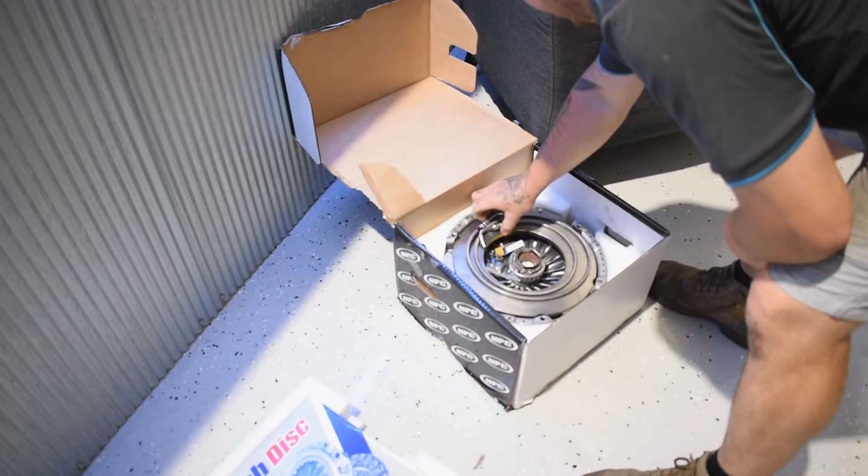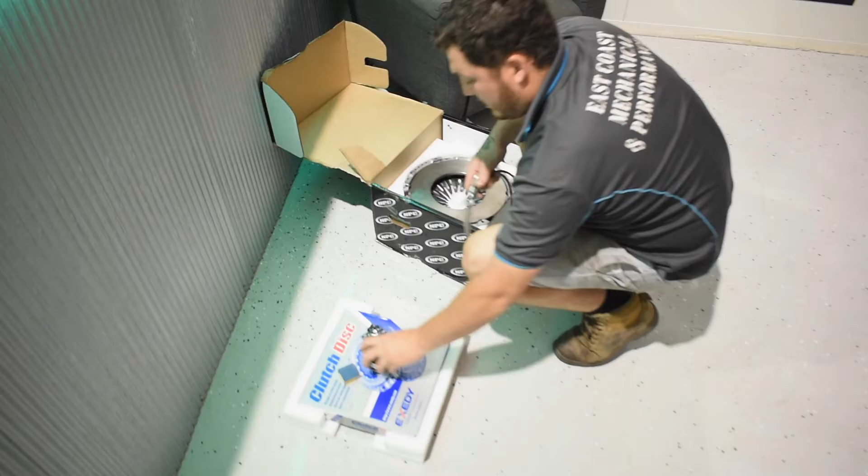1300 Newton meter clutch for the VDJs. Pretty much a must-have as soon as you're going to tune these pre-DPF models, eh? 100%, they will not handle it, especially towing. So they come with the bigger throwout bearing. Our little trick is we opt to have the braided clutch line, gives you a lot nicer pedal feel. Some people say it's not as heavy.

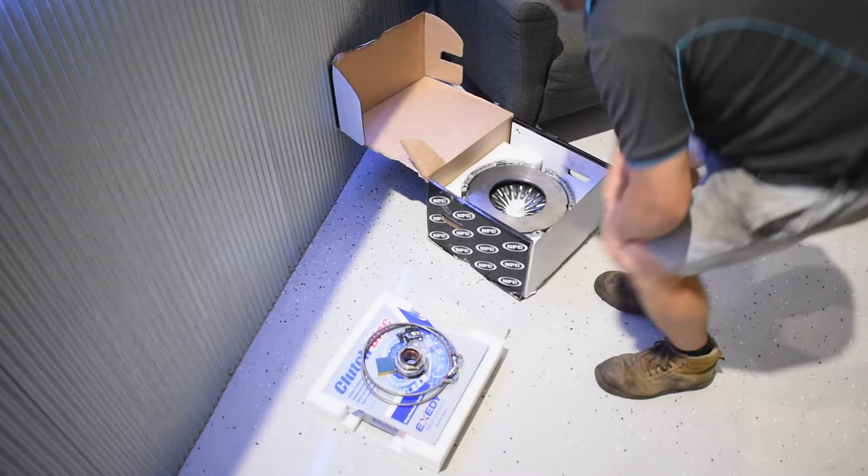Being the 1300 Newton meter kit, it also comes with your alignment tools. Sweet, makes it easier. And your flash billet NPC flywheel. Everybody loves the billet. Hey, give us a look.

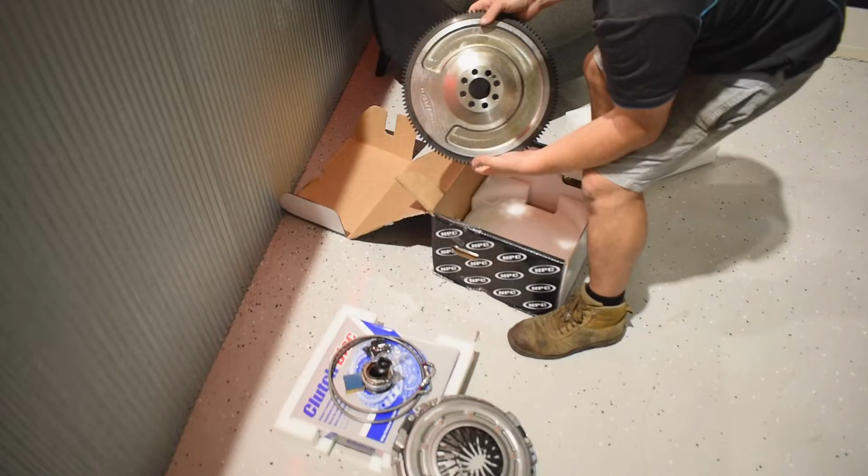Is that bastard heavy? Yeah, it's there, like 30 kilos, that whole box. Yeah, like 26 or something like that. Yeah, I tried to move it before, and yeah, it's there.

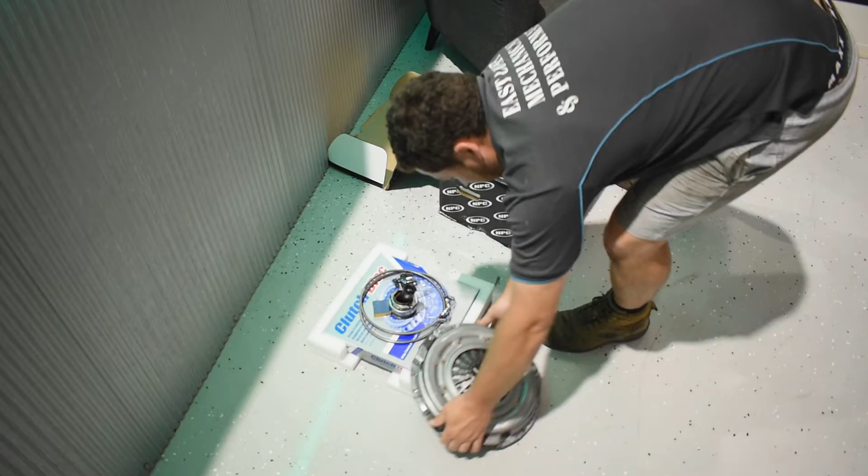So we'll get that in tomorrow, smash it out and see what we can do on the dyno. Sweet man, looking forward to it. We're back down here first thing in the morning. We'll get stuck into this big rig.

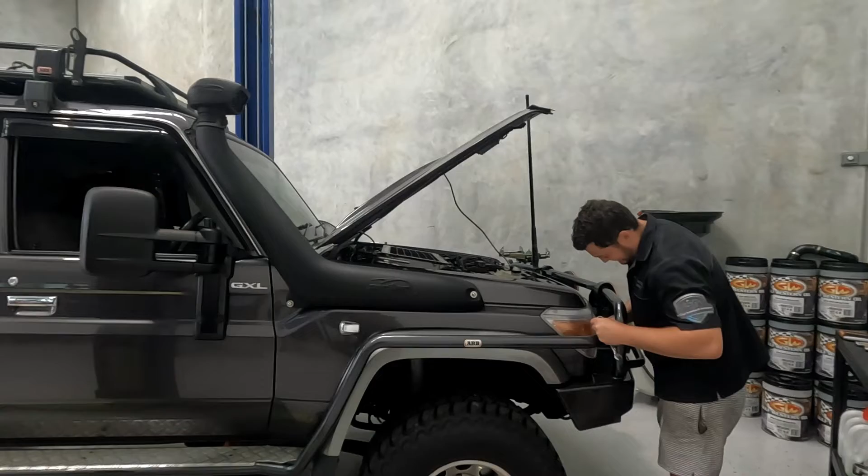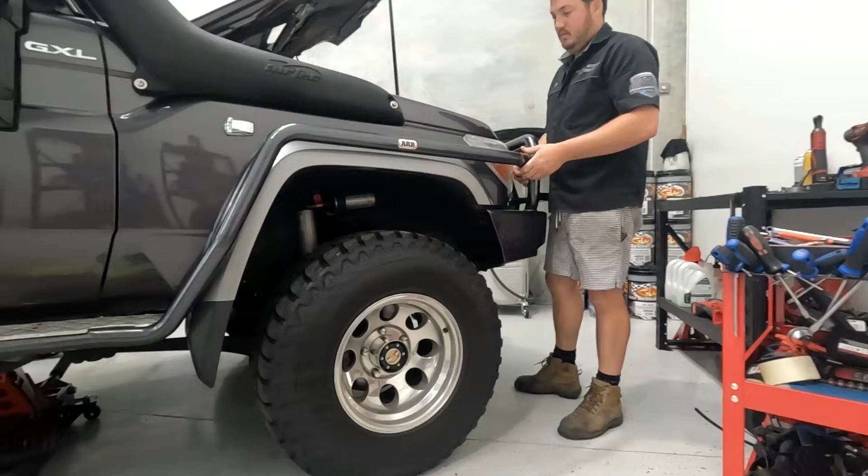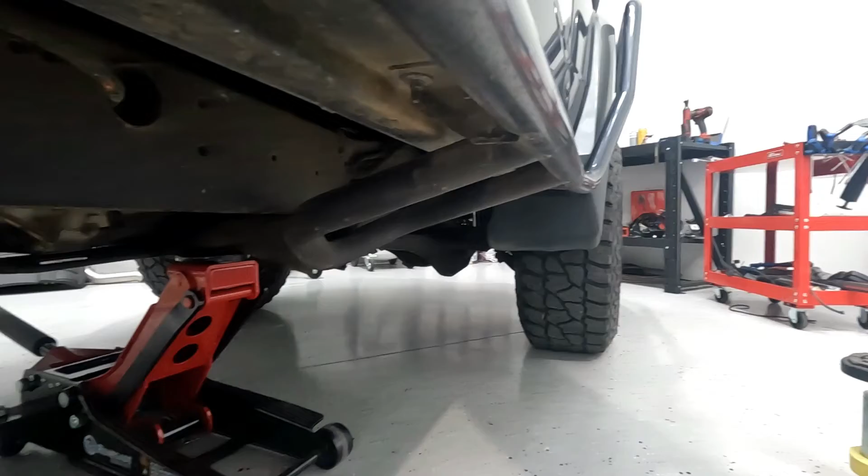What's going on? So with the ARB side steps and brush rails, they actually use the cross member as a mounting support. So what we recommend is, the easiest way to get it out is to completely remove them, one side off at a time, put the bolts back in, do the opposite side, then go up in the air, then move it with the gearbox. Bastard, eh? So let's see if we can see what they're talking about here. You can see the braces for the side steps come down, they're actually one piece with the cross member, so you can't get the gearbox out with the things in the way.

Much fun. Oh, I'm gonna drink my coffee and watch. Ooh, where's your toilet? Give me 5, I'll be back. A few moments later.

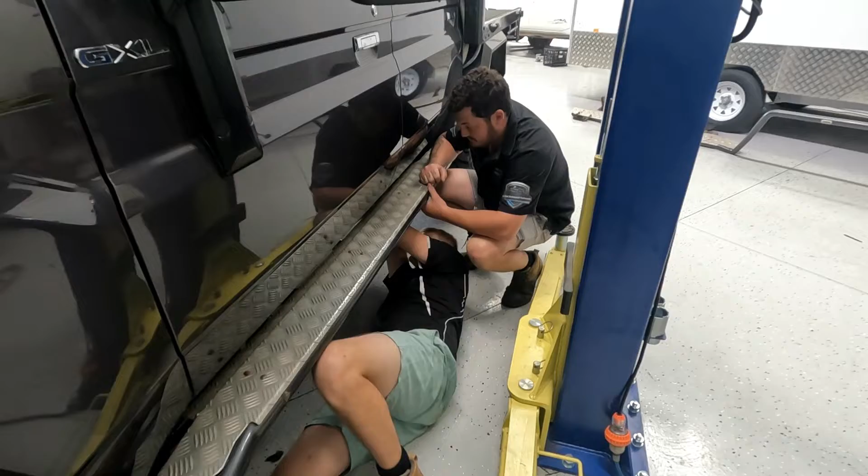How's the view down there, Mitchie? It's good, mate, oh I've had better. A little bit of nut butter? Yeah, did you have a shower last night, Jamie, at least, or what? Lucky for his sake I did. It's not more worse than you have had. Short shorts is life.

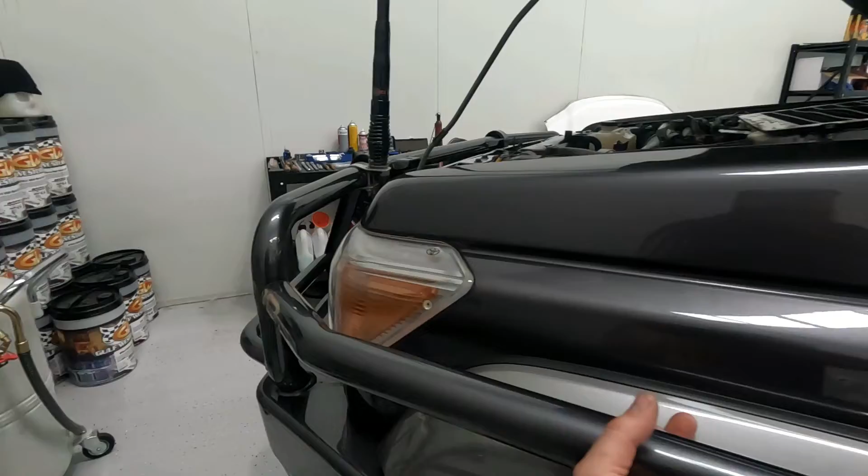So we had to disconnect from the front here, get the sidebar off. Boys are just underneath now, undoing the cross member bolts. We'll drag this fella out.

On a scale of 1 to the Simpson Desert, how much sand's in your eyes, mate? About Simpson Desert? Yeah, a bit of Simpson Desert. I didn't know how to answer that. That's what I'm here for, mate. Alright, it's all yours. Righto.

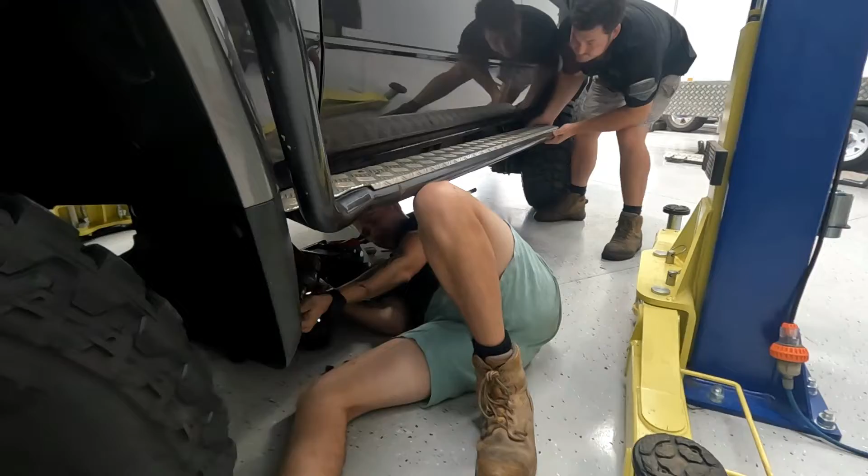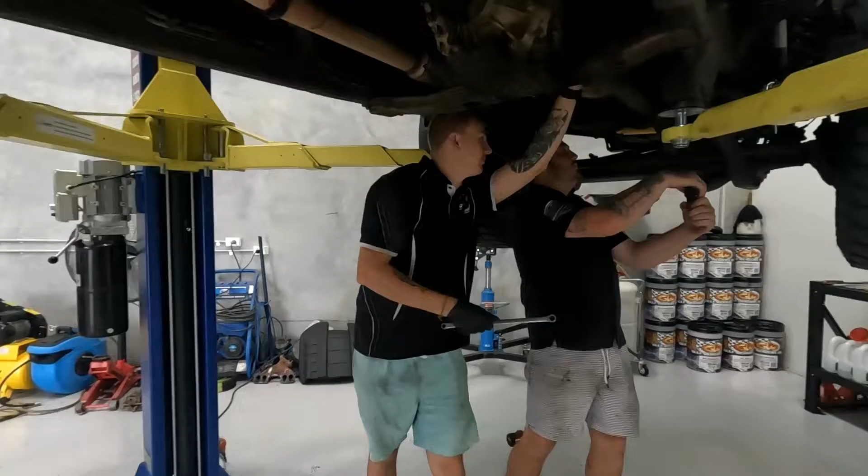Watch this end. Sweet. Beautiful. Righto, scrub bars are off, we're up in the air. I'm not going to go through all the dirty nitty gritty, we've got a bit of a time lapse cracking, so we'll put that on, but what do we got? Sway bars got to come out, tail shafts, got him, because you're not working out, cross member.

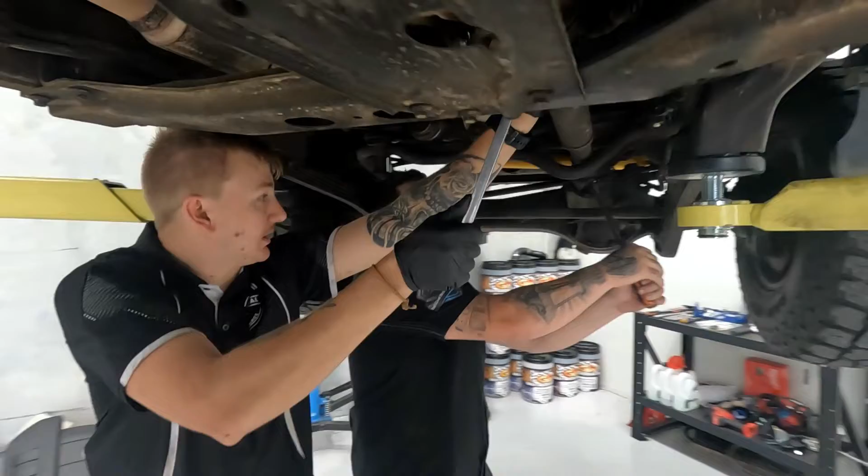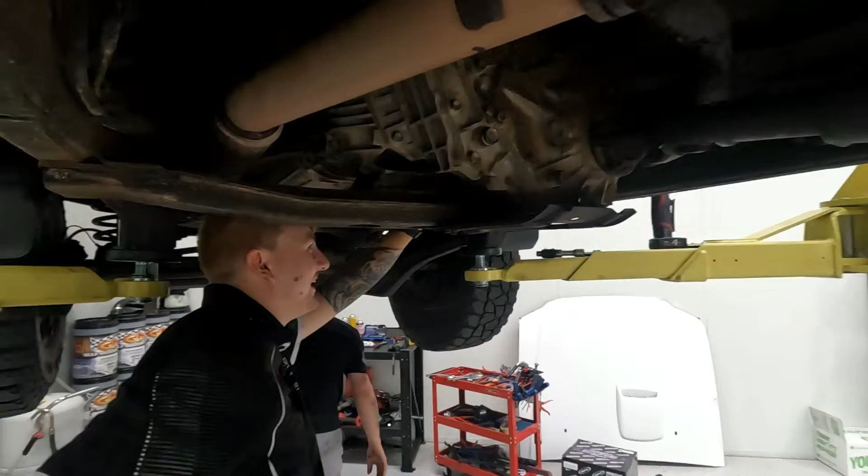Sweet, righto, I'll get out of the boys' way, let them rip into this thing, and we'll come back when we got the box out. When Jamie's playing with his tranny. Loves a good tranny.

Righto, what are we doing? Decided to do something a little bit different, show you if you haven't got a spigot bearing puller, a little bit of the old bush mechanics going on. You got bread on it? Or bread mechanics, surely everyone's got a bolt and some bread. Alright, where's the bread, pretty decent fit there.

With the tape on the bolt, pack some bread, yeah sweet. So you could kind of say this is an inbred way of doing it, maybe? No? Yes? Yeah, yeah no definitely yes. Get in there nice and deep like. I'm so keen to see if this actually works, I've heard about it but never tried it, so here we go. It's kind of actually making me hungry.

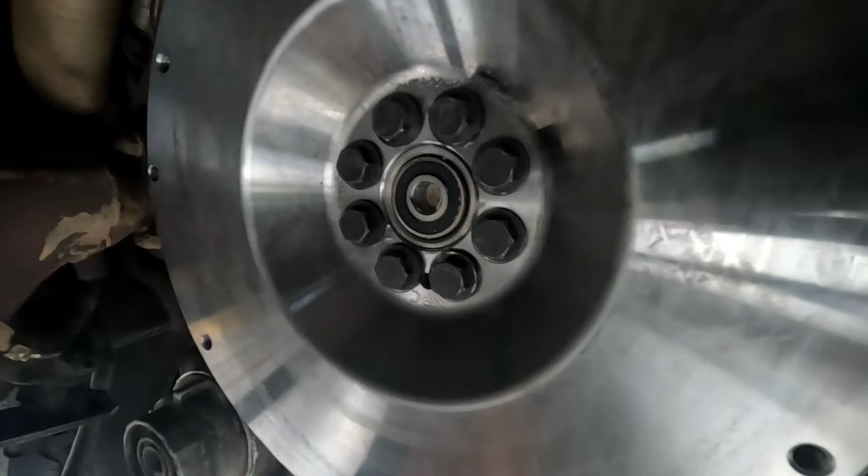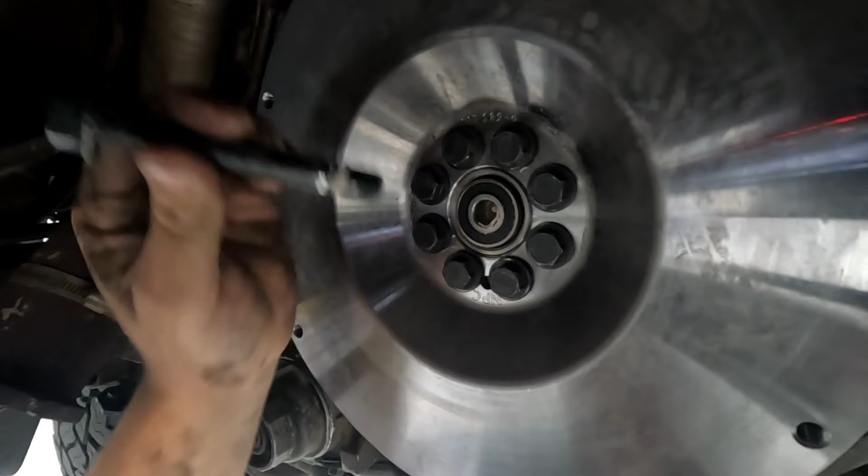Standard, there. Fuck, I am amazed, that's so cool, I love it. And is there anything a bit of bread and hammer can't fix? Seriously.

Hold that, don't eat it. Stop eating my goddamn bearing puller. We're running out, running out of puller.

Get out, there you go. One slice of bread. You want a sandwich? Mmm, nice dough hole, it's one made of knead bread. Get your finger out of there.

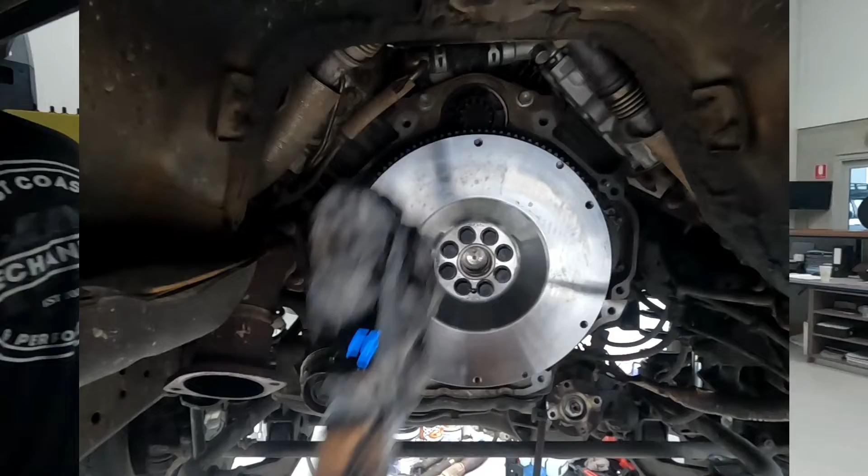These things come with a bit of a coating on them, don't they, to stop them from rusting and that. Yeah, so just a big splash of brake clean or contact clean, get all the shit off.

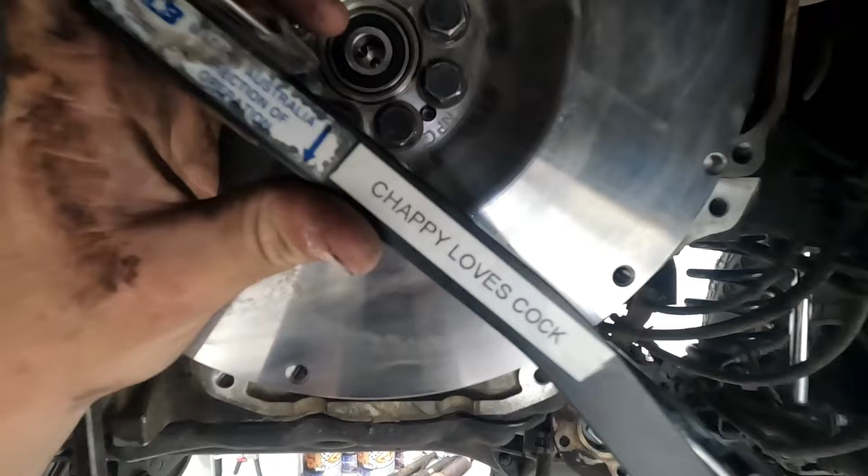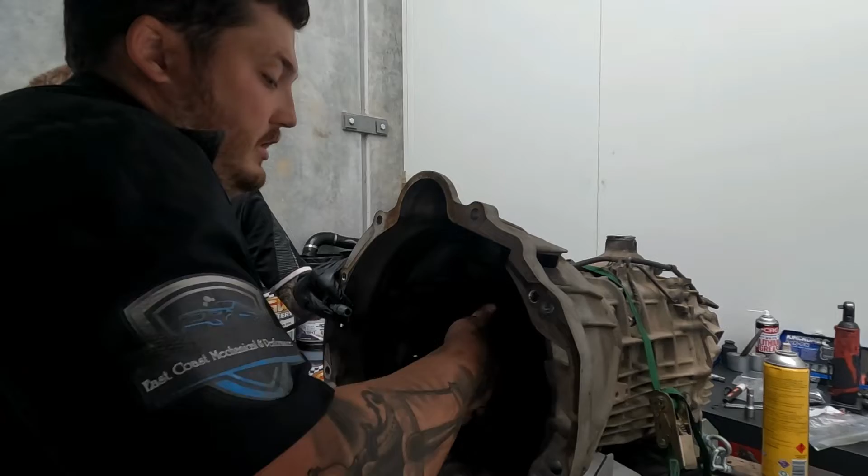Right, well you put a little bit of grease on there. Always grease the pivoting points, because that's usually people's complaint with a feel of a grabbing pedal. That's usually because people don't clean these or grease them, so the throw bearing's got nowhere to slide on a smooth surface.

So is this the most important part of every clutch install? This is it.

Leave a message for the next bloke.

Right, we're all back together. Just going to take it for a burn now and bed that clutch in a little bit before we hurt on it too much. Give her a few Ks, let it run in, and we'll put it on the dyno.

Perfect, man, I'll go down and open the shop. I'll see you soon. Right, deal.

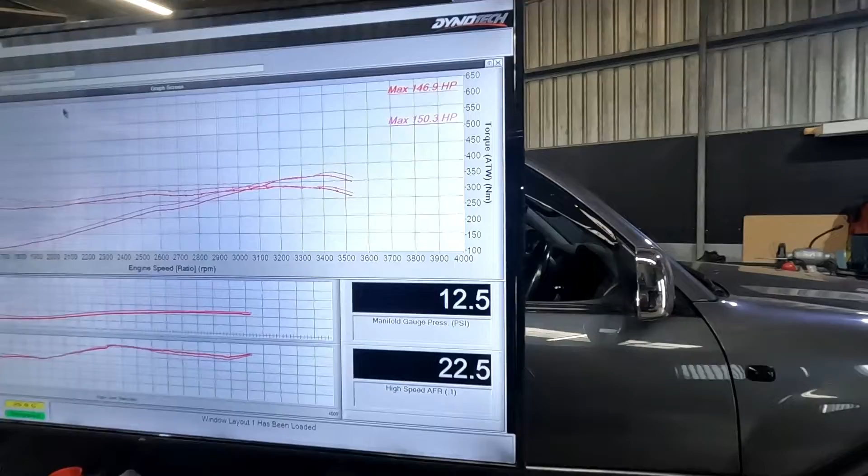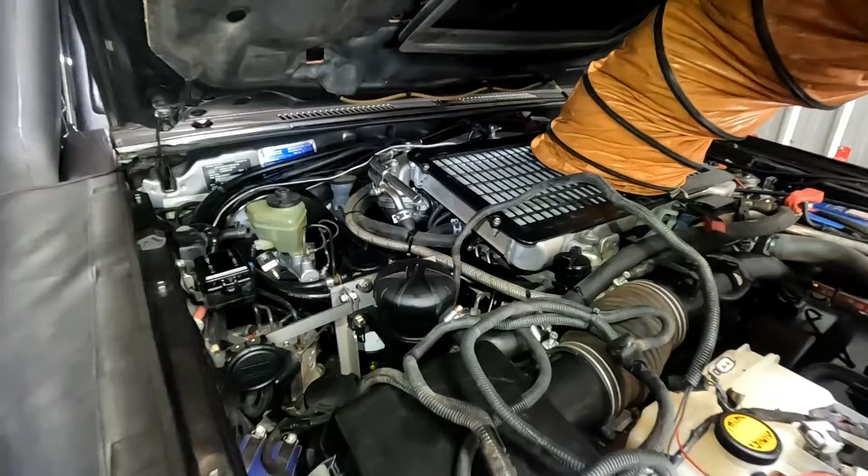Right, just unplug all the Steinbauer. It literally plugs into power, goes on your throttle. This one was also plugging into the map sensor, which is better than half the ones we've seen, and goes into each injector. So we'll get this linguine spaghetti mess out of here, dog's breakfast. Hoik that.

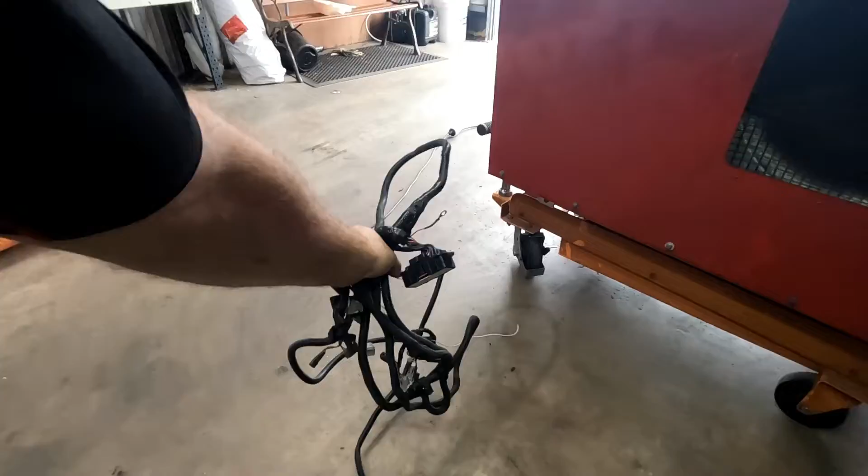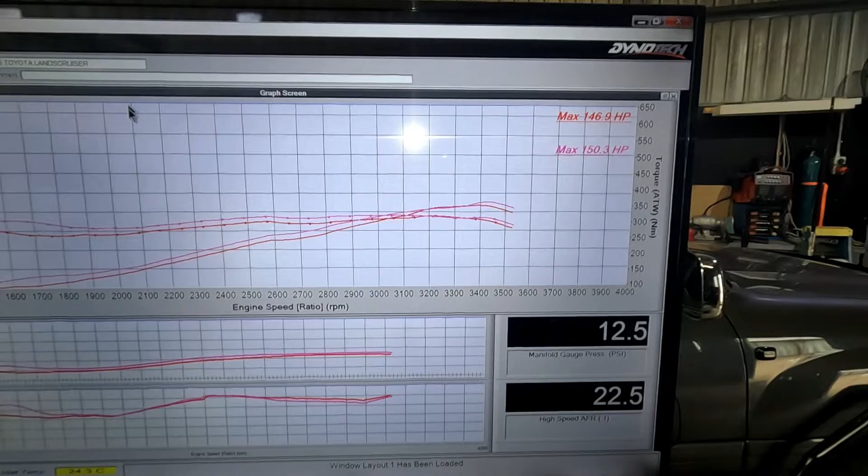Now we'll do another base run, see what kind of figures we get. We've done 2 runs before, 146, 150. We'll take the better of the two, the 150, and call it even at that. We'll do a run now and see what the Steinbauer was actually doing for it.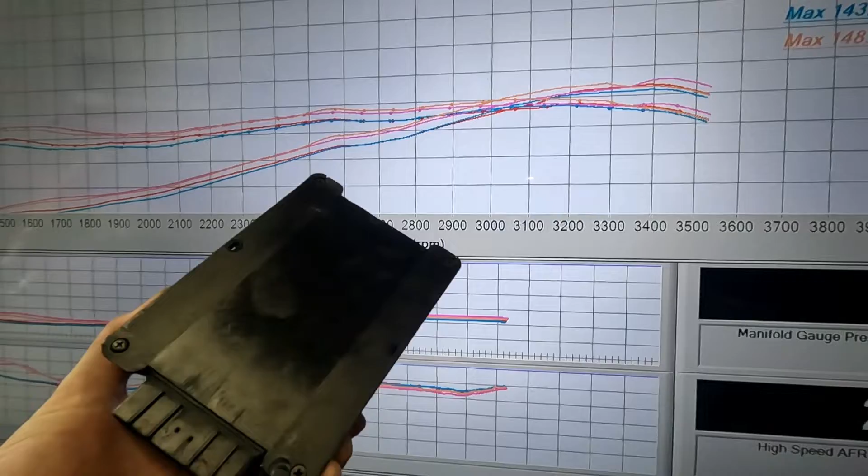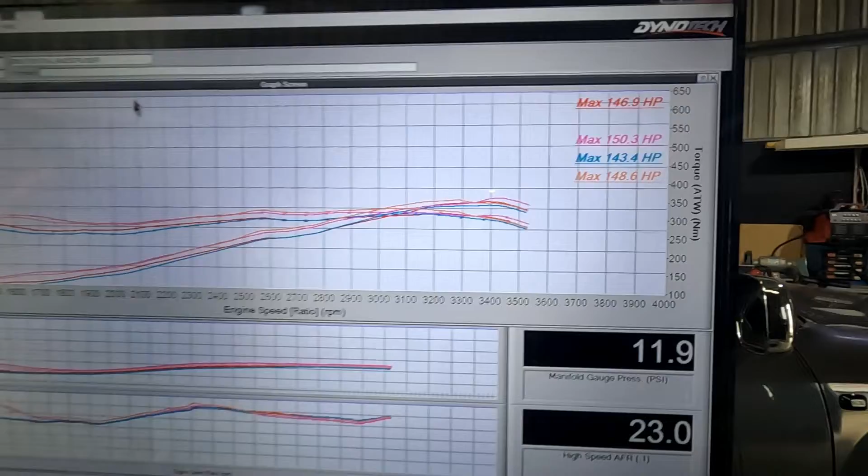Well, we've just done another 2 runs. I don't know whether this thing wasn't turned on or if it's turned right down or what was going on, but either way, there it is. Before it went 146, then 150, now it went 143 and 148. So call it what you want, 2 horsepower. My guess is the thing wasn't probably plugged in, but anyway, there we are, that's what it's done.

There we go, we'll start throwing some tunes at it now and see how the thing responds.

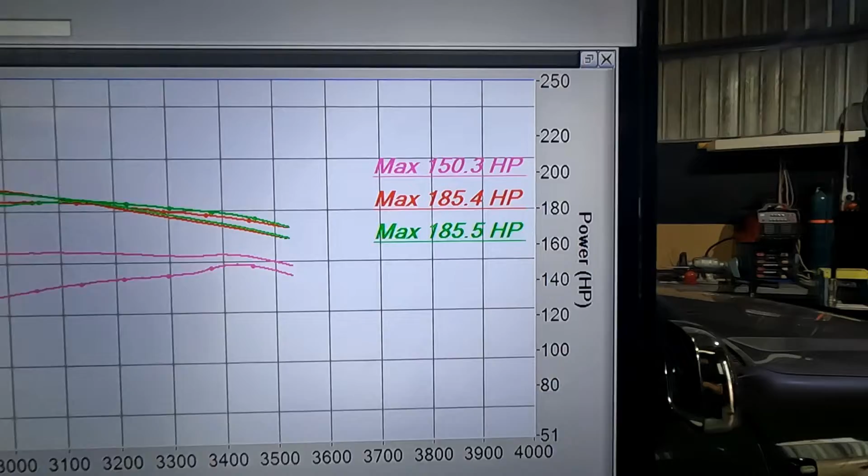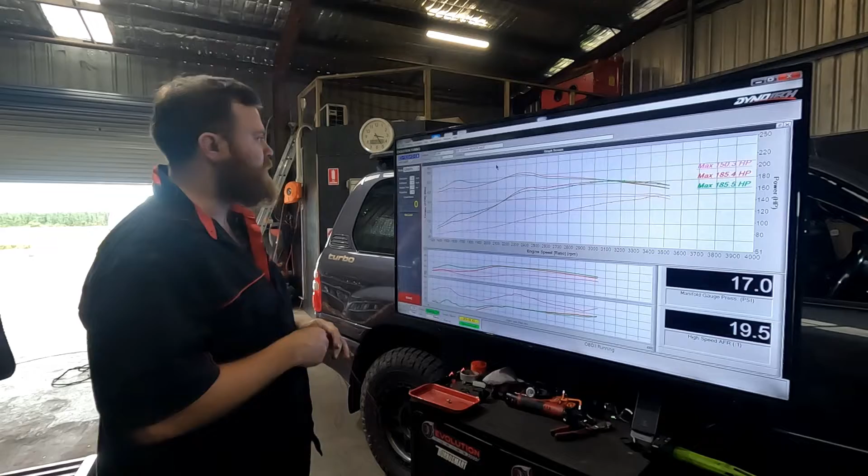Right, so we just put a base kind of startup tune file in it just to see how the car's going to respond to tuning and the changes we're making in the ECU. You can see why it's always important to do 2 runs on these things. First run, the boost was pretty lazy down low, then kind of come in. Second run, it was a bit better, but real fuely down low.

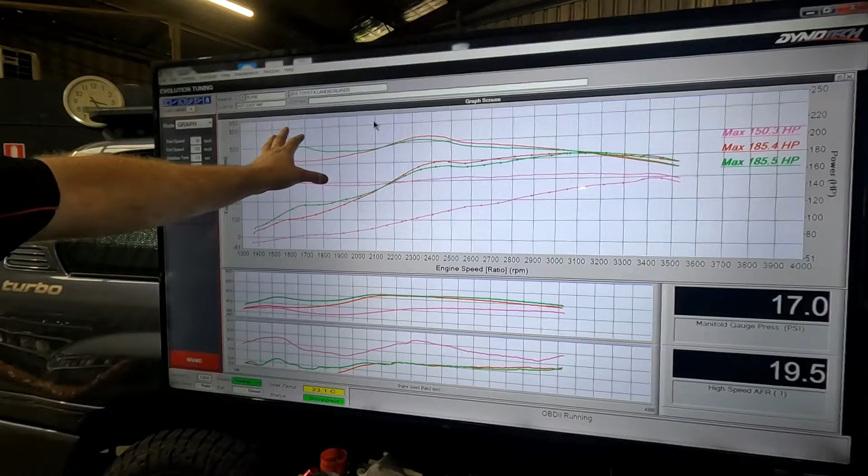So we'll probably go in now, try and make some changes to the VNT maps and the bits and pieces, get that boost coming up a bit earlier. Hit a peak of about 17, might try and get a little bit more out of that, maybe up into the 19s, maybe just touch the 20. Hopefully that should bring this torque kind of right up into the high 500s, maybe touching 600, a little bit more in the top end. Cool, we'll make some changes and see how she goes.

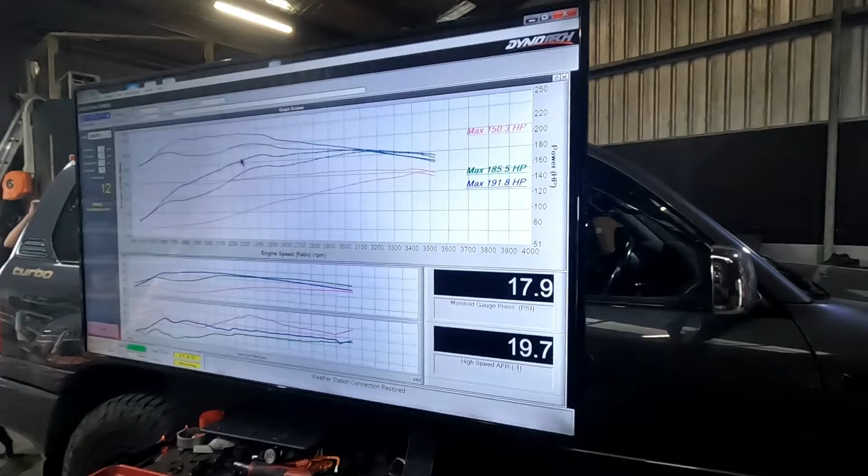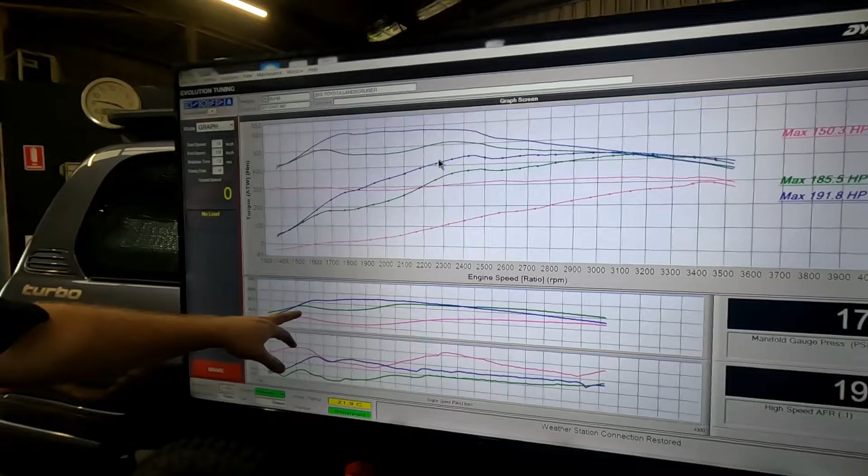That's a very similar tune to what we had in there before. Just gone into the boost tables now, done a bit more work with the VNT. You can see before it kind of come up, settled out, then came up again. We've still got around about the same sort of peak boost numbers. We had a bit of a crossover there at 18, but now we're hitting it way earlier.

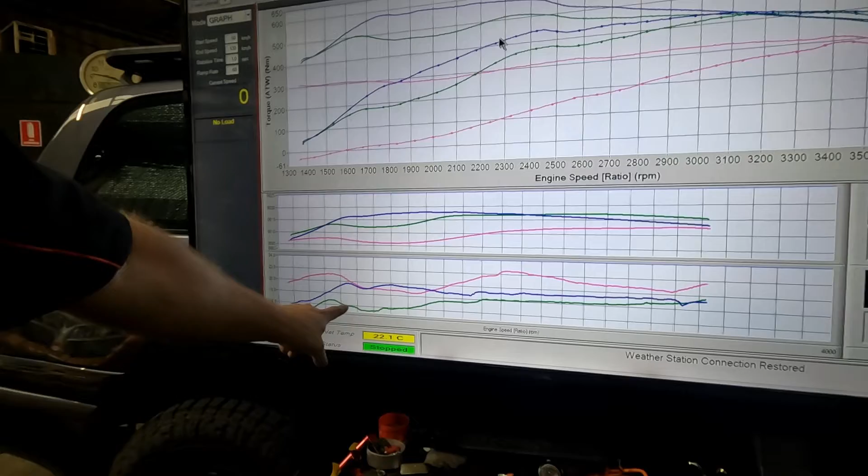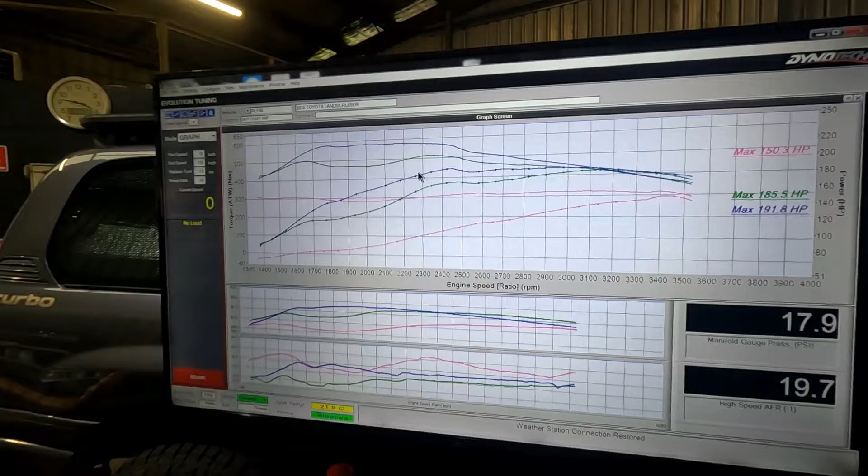So that's brought down here, it was real fuely before, now we're up in the 19s, 19.5 pretty much the whole way through, and we're getting right up pretty close to that 600 newton meter mark at about 191. So we might make a few more little tweaks and changes with it, see if we can get a little bit more out of it. But at the end of the day, I think this bloke tows what, 3.5 ton behind this thing pretty much every day.

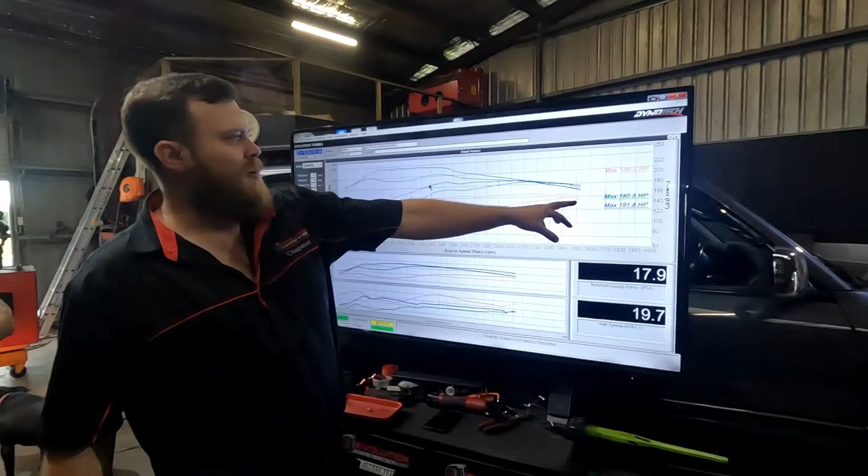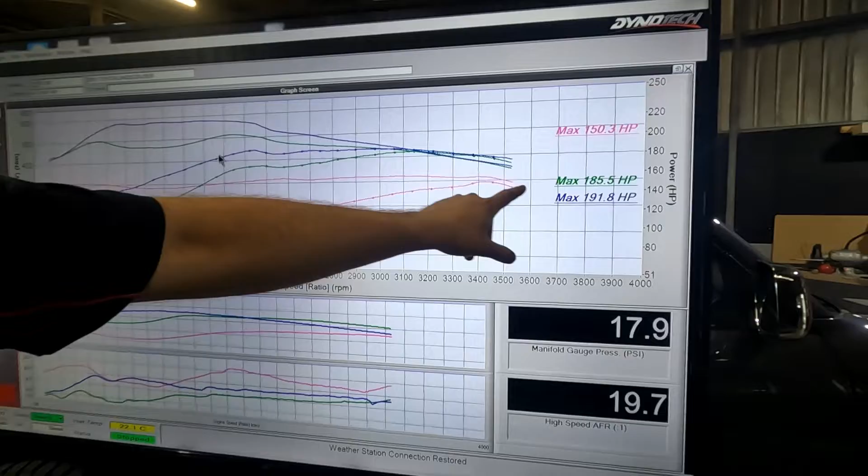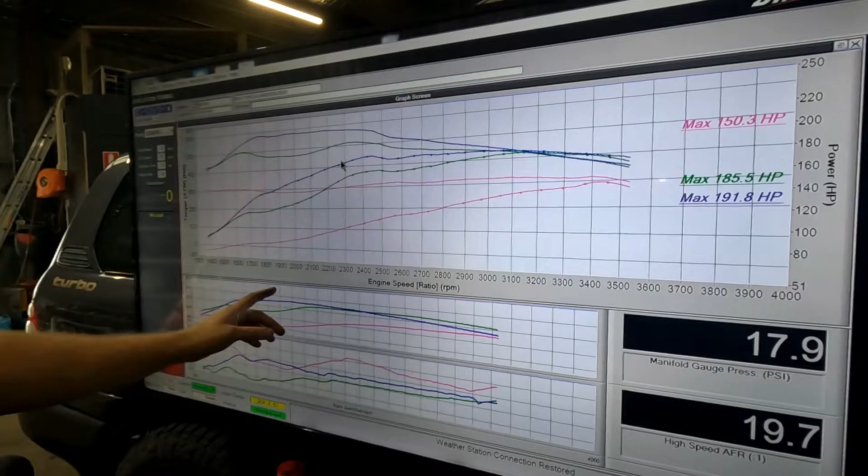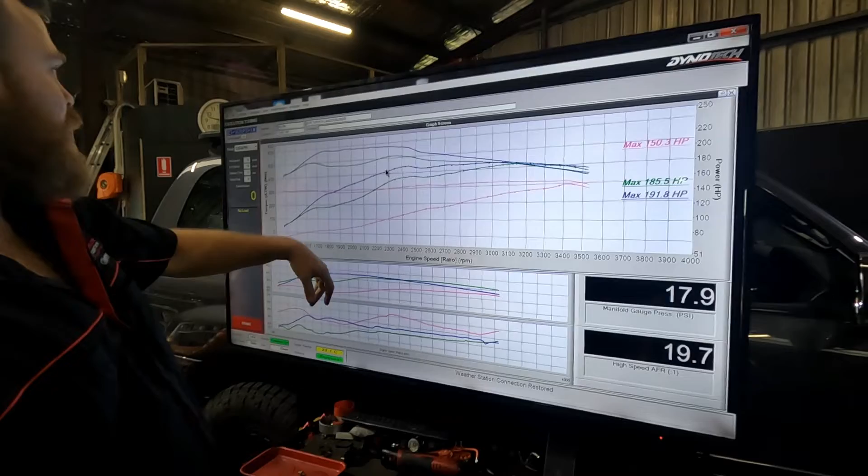But that's peak, right? If you're looking at 150 and 191, it made peak power here. If you come right back down to 2.5, we've gone from about 110 horsepower up to about 180. So in that actual usable range, say 1700 to 2700, it's really more like a 60, 70 horsepower jump, and almost double torque, around that 300 to just under 600.

So it's all good and well saying you're making big power up here, but this dude's going to drive this thing from 1700 to 2700. That's where it really matters. So we'll make a few more changes, see if we can't get a little bit more out of it, and go from there.

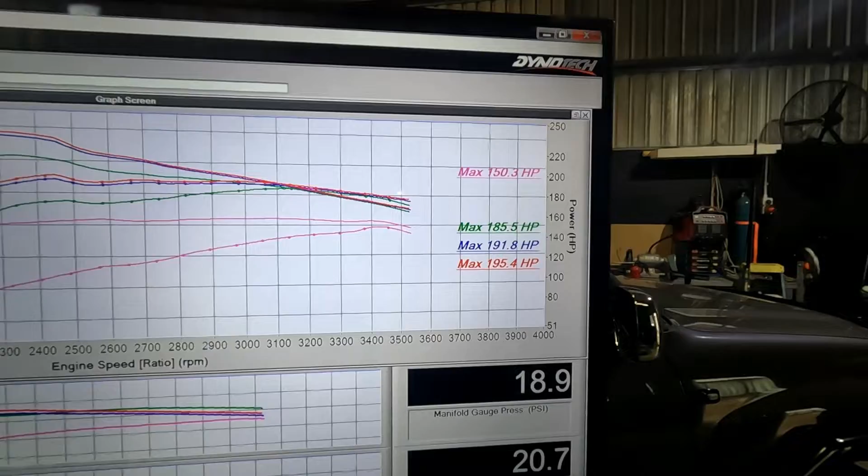Righto, so we just made a couple more changes. Put a little bit more boost into it just to try and clean those AFRs up, get them right around that 20 to 1 the whole way through. We ended up around 19 pounds, which resulted in getting a couple more horsepower, a bit more torque the whole way through, just a smidge.

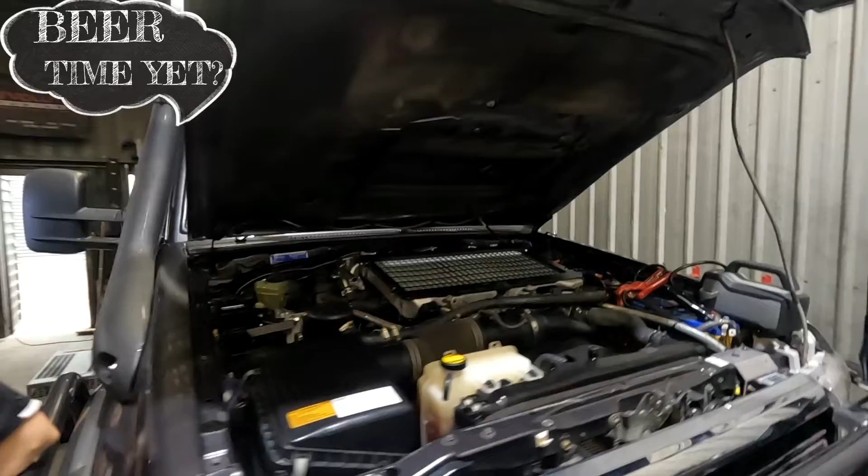Should be nice now. I think we got him all disconnected - dyno, the MAP sensor and everything out there, AFR probe off. We'll take him for a drive and see if we can better that 60 to 100 time.

Feels better already when I just left the driveway. Heaps better, much better. Yeah, cool.

So we're going to take this thing for a little bit of a test drive, just make sure it feels good on the road. Big part of tuning is really drivability. Like I said before, it's all cool making big power at 3,500 RPM, but unless it drives nice everywhere below that, it doesn't really mean anything. So we'll go for a bit of a drive out to the highway and back, and then find a bit of a quiet stretch down in Mexico Lane and do some 60 to 100 runs and see if we can better that 15, 16 seconds from yesterday.

So we're just cruising along now, and Jamie made a good point. Yesterday when we were out driving, and even this morning when you were bedding the clutch in, the pyros were like 300, 350 just coasting along at 80. So these things, especially with that Stein, we didn't get a chance to actually show it on the dyno, but even just maintaining speed at like 60 and 80 k's an hour, it was sitting around 21, 22 to 1. Basically just overfueling for the sake of overfueling.

So now, with all that gone, a bit more boost, we can actually play with the VNT map so we can get the boost sitting a bit nicer. We're at 2 grand now, coasting along, and it's sitting just under 10 pound. It's under 10 pound and not even on the scale of 300 yet. So there you go, the EGT start at 300, and it's not even showing anything yet.

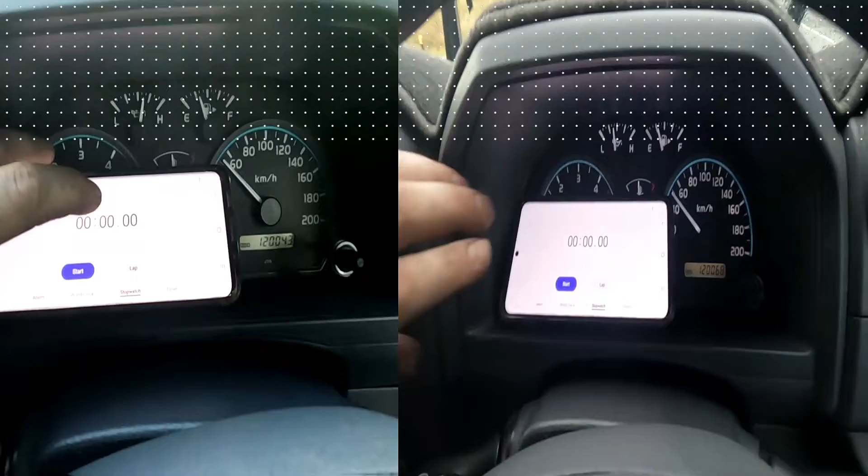When you're at 60, let us know. Go. When you're at 100, tell us. Stop.

No, what do we do? 7 seconds. Well, that kind of makes sense, because if you think about it, we've just virtually doubled the torque of this thing. We went from 300 Newton meters to almost 600, which makes sense. But yesterday we ran, what, 15 seconds? Yeah, 15.7 or something. Yep, so big difference - 100% increase in torque means literally halves the time.

Yeah, drivability is just next level. It's a different car. Yeah, awesome. Can't wait for old mate to get it back and put his... what's he tow with the thing? 3.5 ton van. Jeebus. Yeah, right. Yep, is that his limit? Yeah, yep. Oh, cool. We'll get the thing back to the shop and get it finished up.

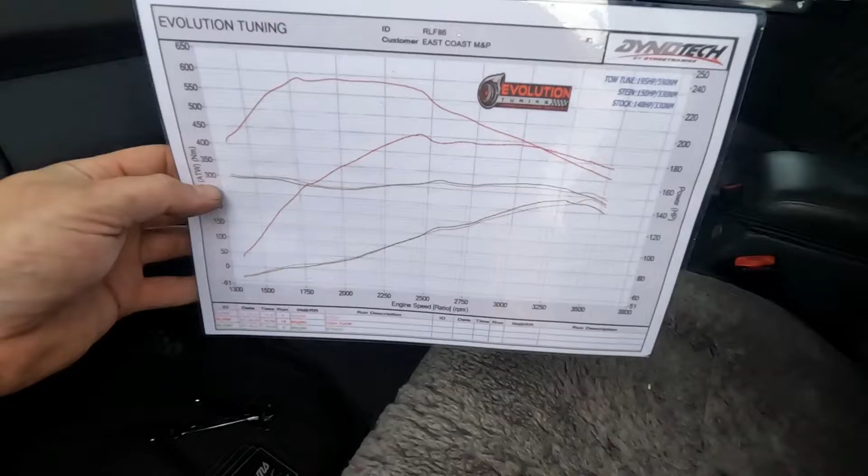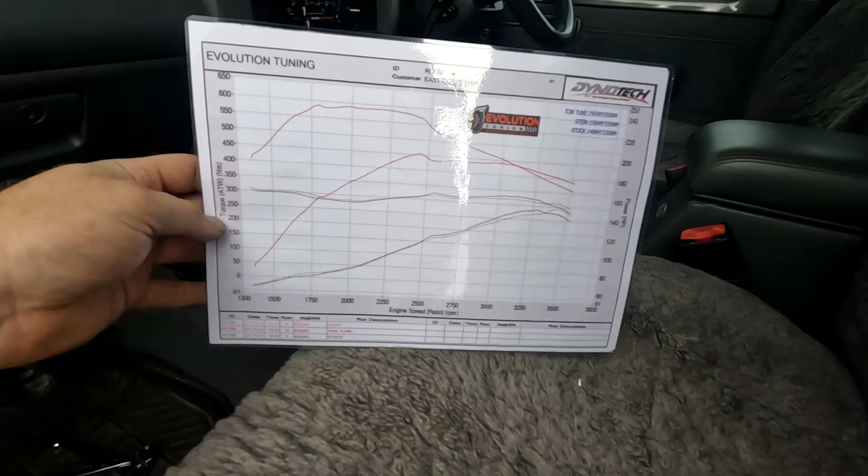Well, there we go, all done and dusted. As we talked about before - oh, that glare's fantastic - she ended up at 195 and 590. Much more usable torque. So like I said before, this dude really uses this thing just for towing, flat out.

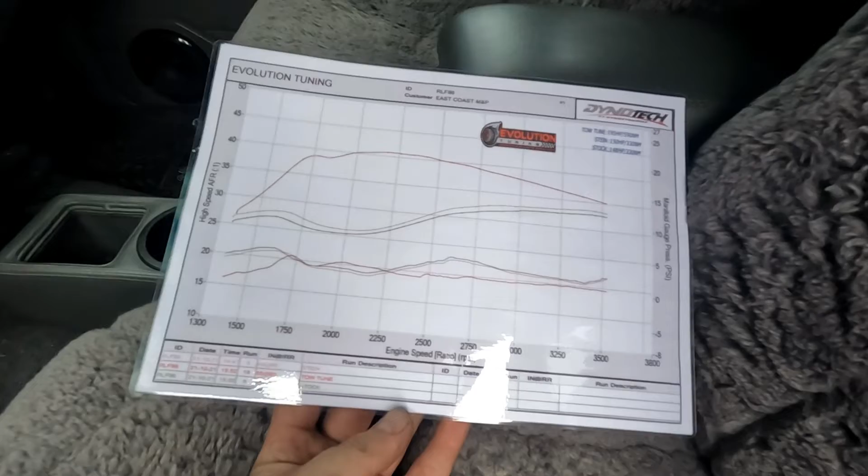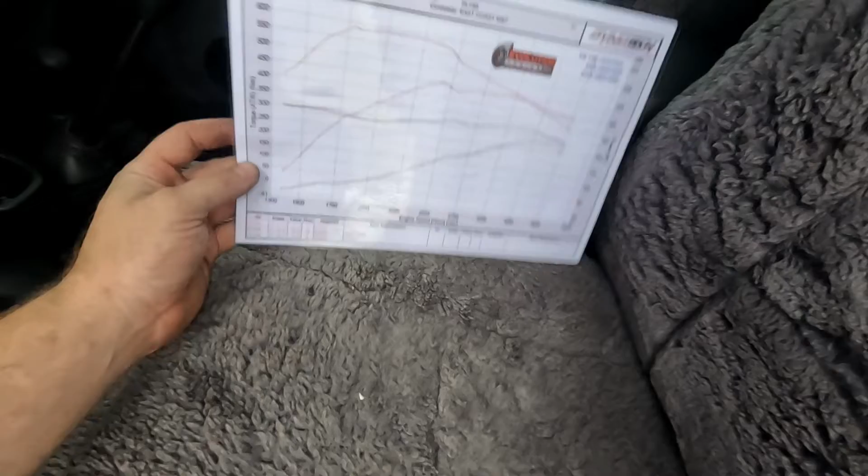On the back there is our boost and AFRs, so we always give a full printout of everything. The customer gets all the information so they know exactly what's going on with their car. Ended up taking us an hour or two on the dyno. But if this dude wasn't towing, and he wanted to just full send, we probably could have dropped the AFRs down into the 17s, into the 18s. Would have picked up a bit more torque, would have cracked over that 200, maybe 220. But this thing's nice and reliable - we'll do this thing for the rest of its days. So we'll give it back to the customer and see what his thoughts are.

Cruiser now, just having a couple of beers at the end of the day. Customer got it back, I think he was pretty stoked with it. Wrapped, yep, I think we're going to get it back.

May even be in the same episode. We might get it back in another couple of weeks, do the 4-inch exhaust, and we'll do a back-to-back run on it, see if we get much gains out of that.

But anyway, thanks Jamie for your help. Thanks mate, thank you. No worries, thanks mate. Anytime, I'll catch you next time. See you guys. Righto, so it is going to be in the same episode.

That's Cool Fabrication. You've done the full 4-inch system on it today, didn't you? Yep, 4 inch, sweet. 304 stainless, turbo back, all TIG welded, nice and pretty.

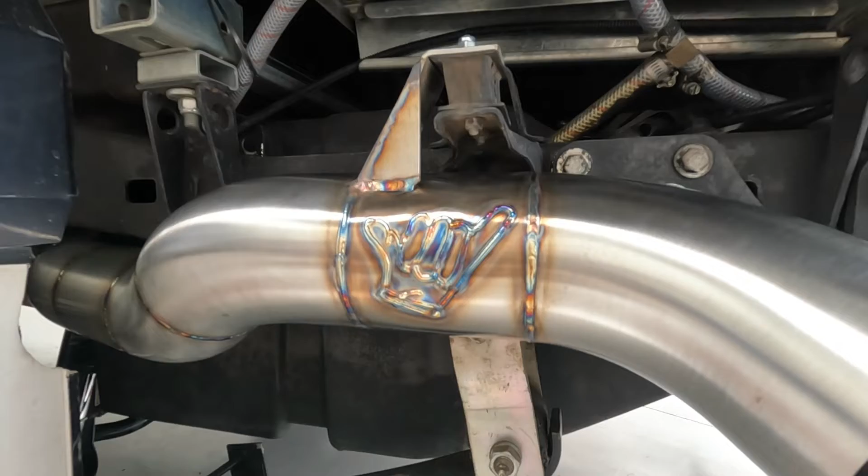Sweet, I'll crawl my fat ass underneath there and try and get some pictures and videos of it. Looks smick, it's obviously your logo on there. Did you do that this morning? Yep. Yeah, it looks cool man.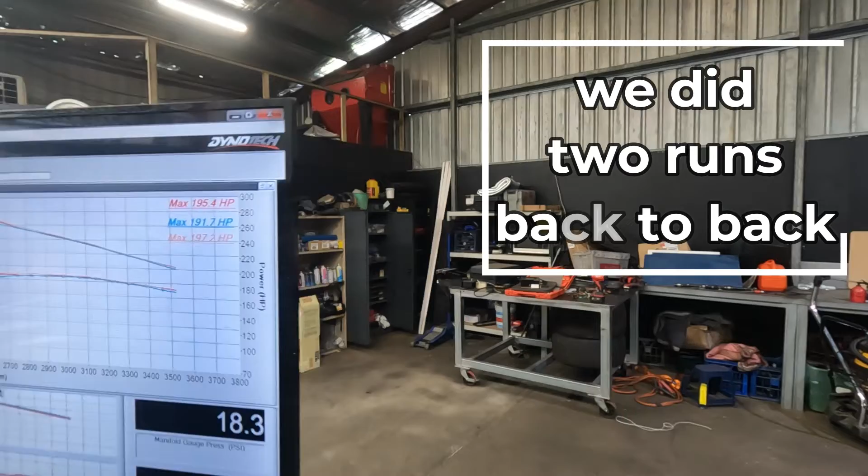Well, there we go, it's at about 2 horsepower. So, can you remember what you said now? 3 to 4. Yeah, I can't. I think I said 10, 15. Yeah, well.

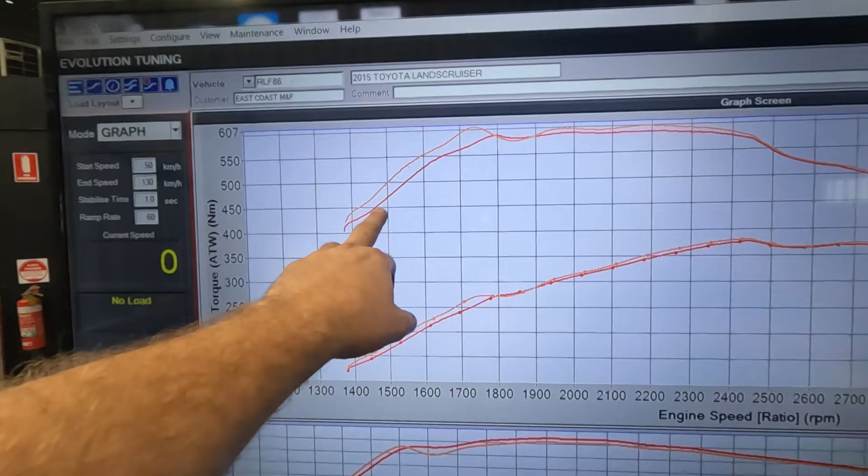But it's kind of interesting. Again, this thing's virtually stock, so stock turbo, just an exhaust. That's pretty much it. It's basically doing what you'd kind of expect from a free-flowing exhaust, and that is, one, coming on boost and getting up sooner.

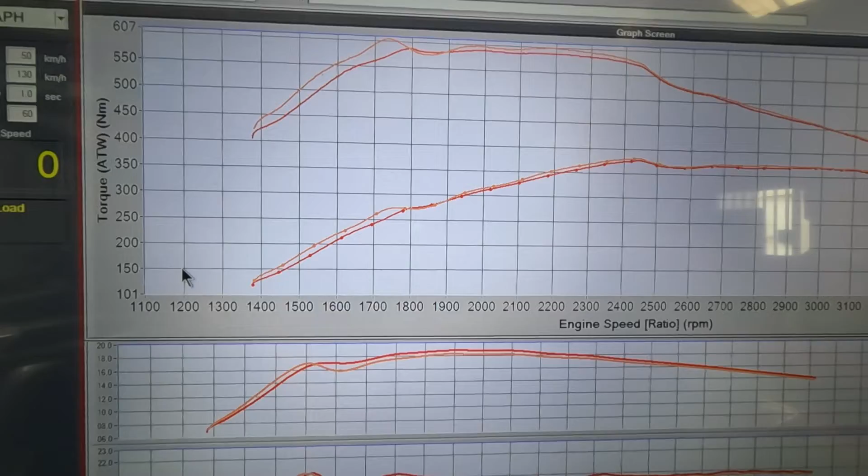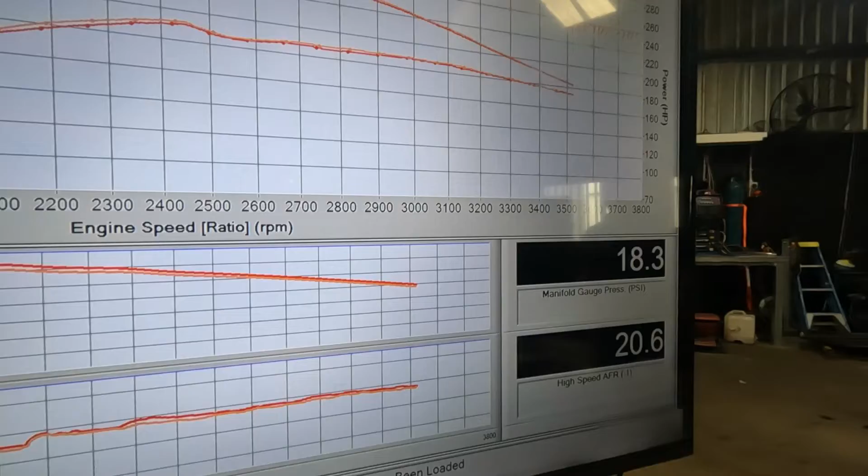We have introduced a little bit of boost bounce there now, obviously with much less restriction. Interestingly enough, you can see it's making a touch more boost, then settles out and actually runs a little bit less boost the whole way through. AFRs, virtually exactly the same, but we just picked up a couple bits of horsepower.

So I imagine, kind of like we talked about, if you had a 300 horsepower setup, a big turbo, all those kind of things, that's where this would really come into it. But yeah, a gain's a gain, I suppose. There it is, dyno doesn't lie.